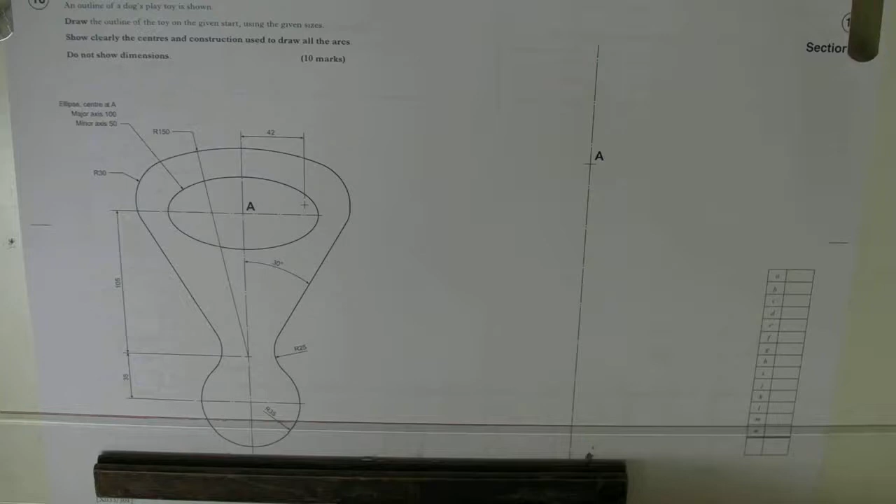Okay, I might not do a lot of talk on this one, but just try and show you.

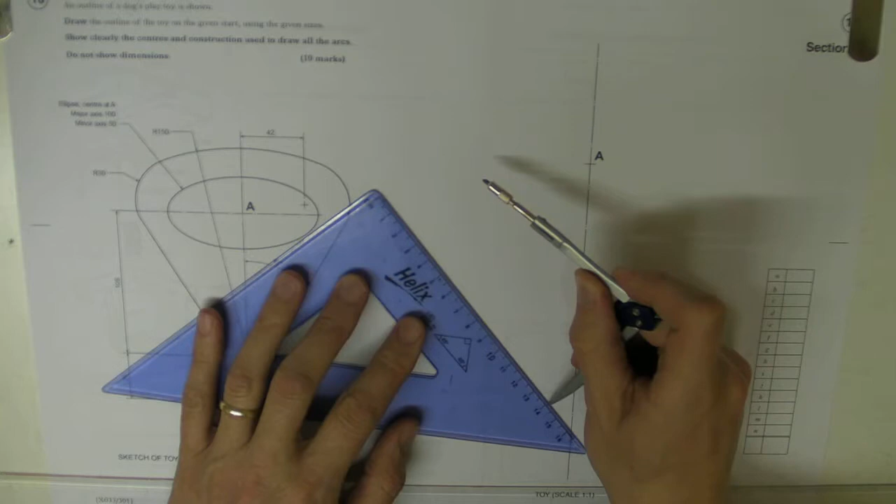Firstly, I'm going to start with this circular part down here. It's 140 down from A, so you just set the compass and measure down. That's the point there. Set up a centre point.

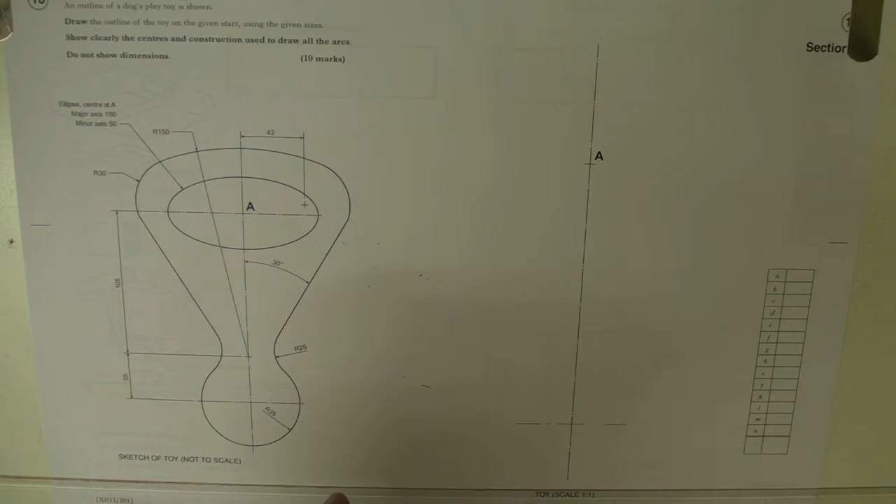Okay, this wee circular bit down here is radius 35. Compass to 35 and then draw it. Obviously it doesn't go all the way around, so I'm just going to take it round like that.

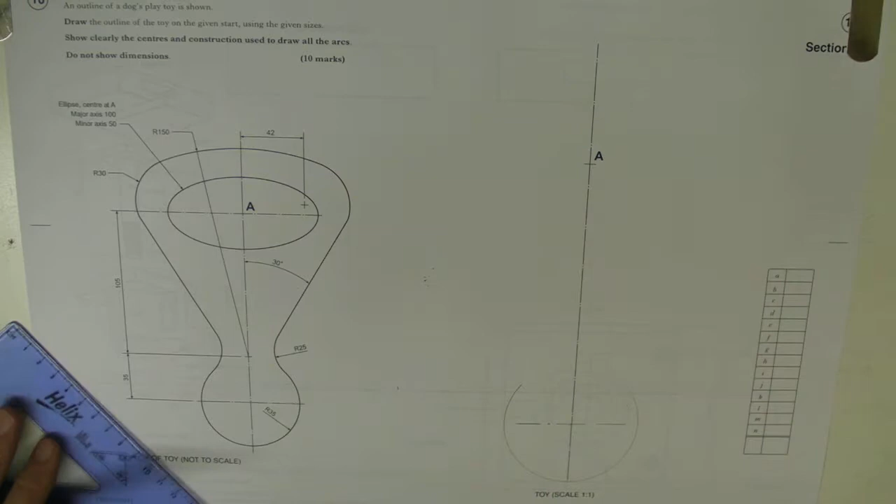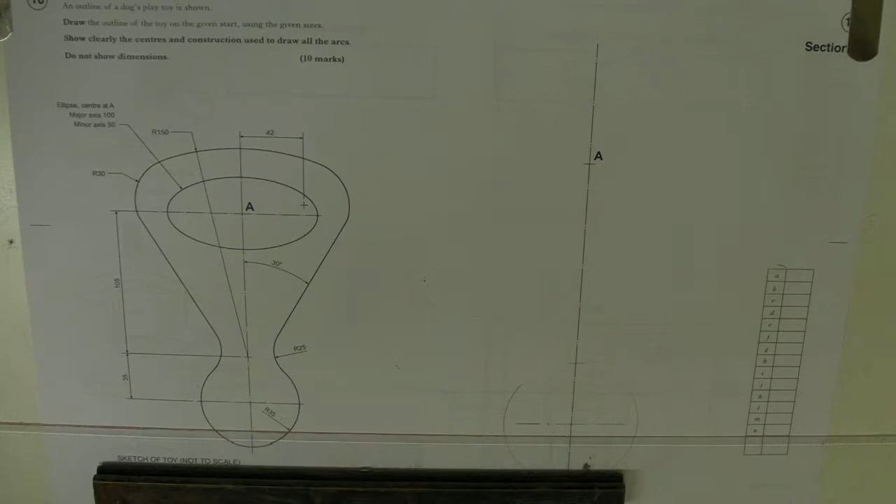This big curve here, centre is there. It's 35 up from that centre, sorry. So it's there. That's the centre point there, and it's 150, so set the compass to 150. It's a bit of a stretch, but just the way to do it. It's 150.

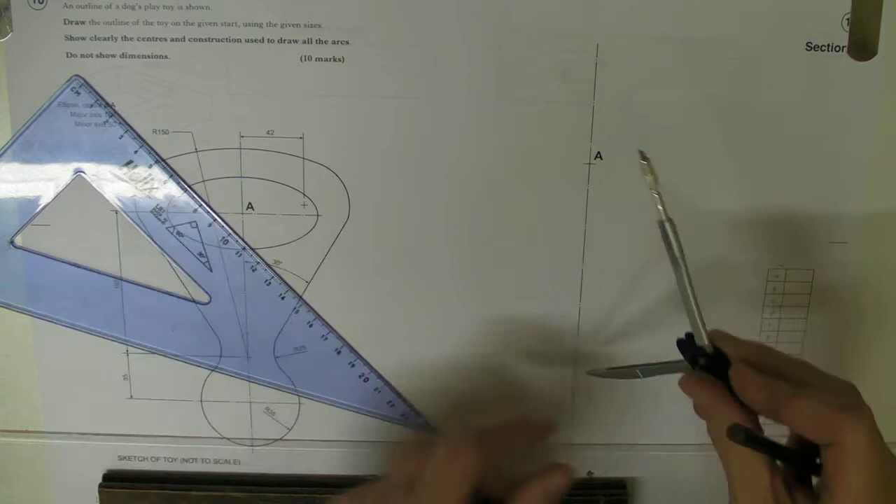Okay, so that's probably the easiest bits to do.

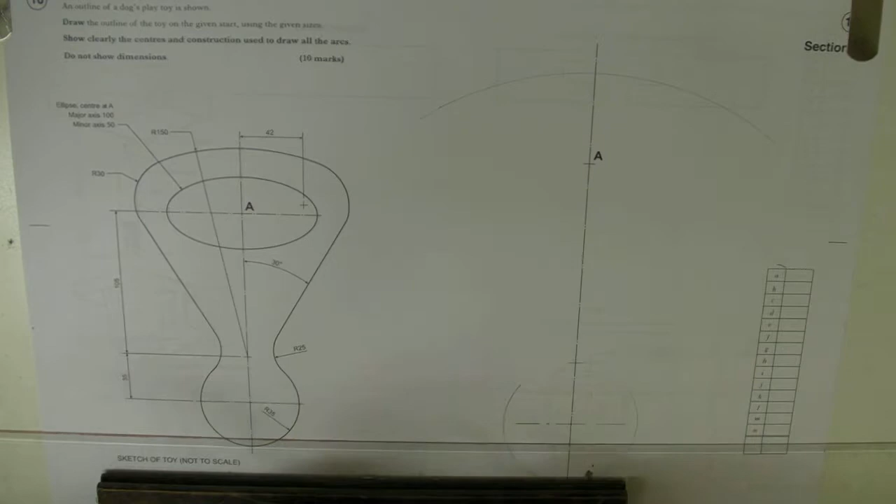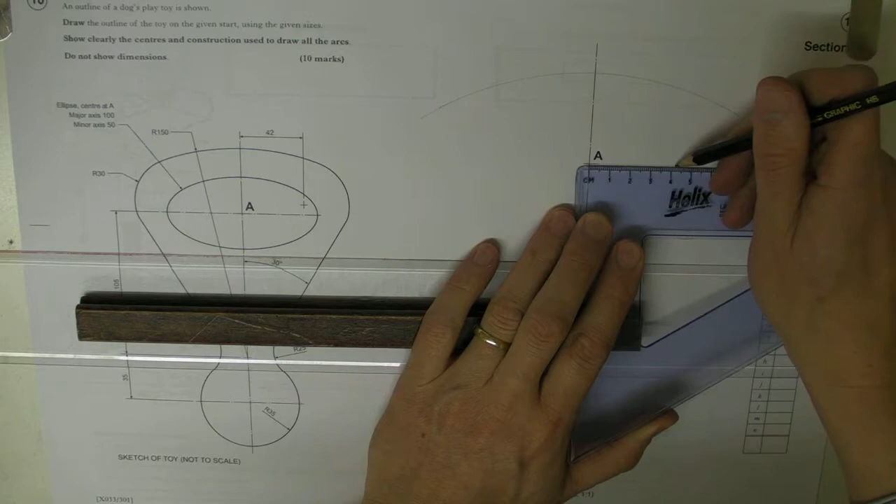The centre here, which is the centre of the arc here, is 42 from A. We don't know how high up it is, but we just know it's on that point. So I'm going to draw a wee line out, measure out 42 and mark it. That's 42 there. Then just going to mark a line.

I know it lies on that line somewhere. I'm going to check something a minute. Actually, I'm going to stick my compass in there, put that so that it's on that line, and just make sure that it would actually trace it out. Yeah, you see there, it does.

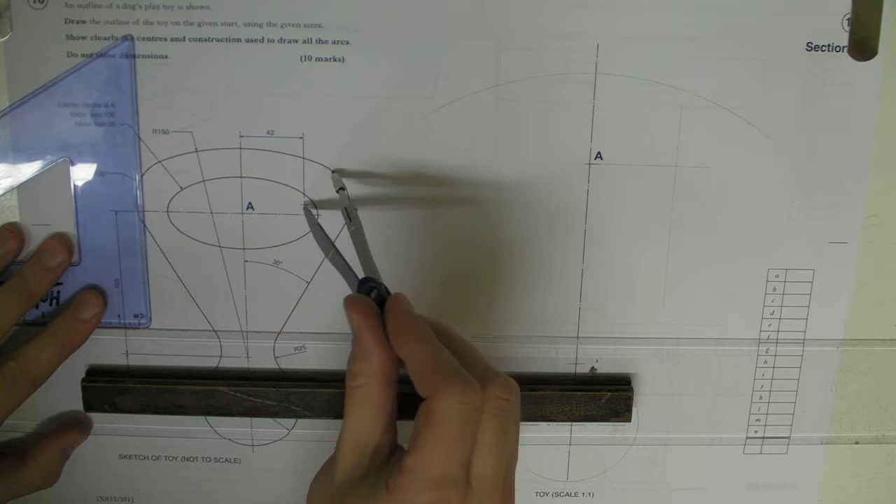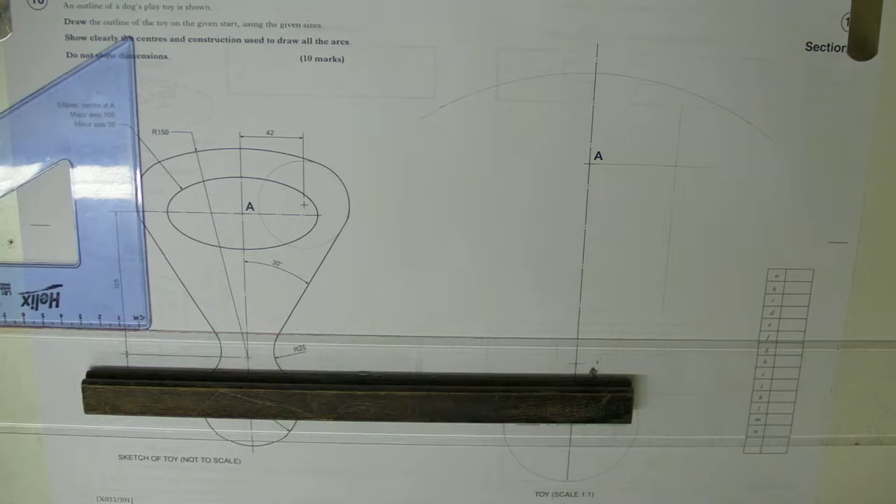Okay, so we know that's like the kind of right point for it. So that's clearly a tangent to - if you draw it in actually, I'll show you - it's a tangent to that curve there. So it goes inside that one, right? And it's also a tangent to that line at 30 degrees.

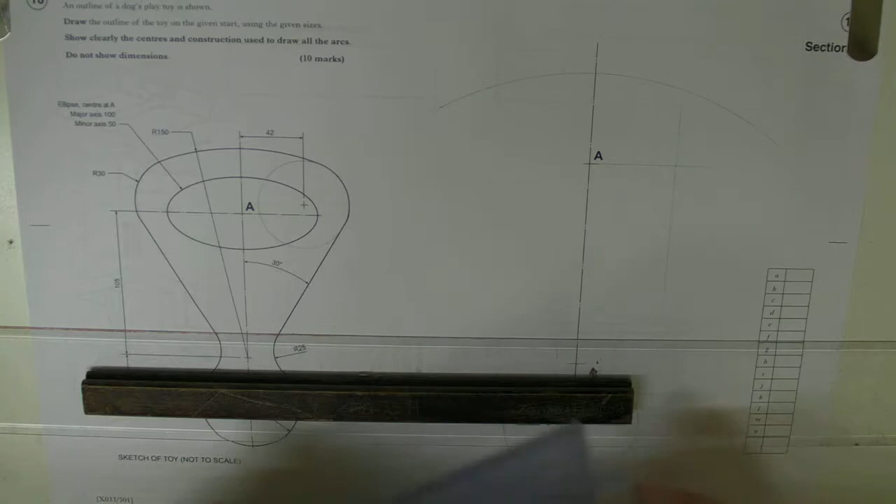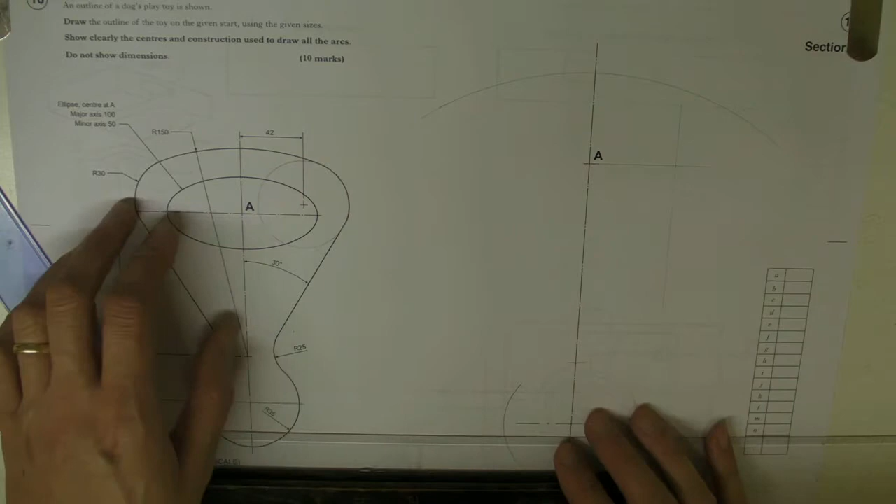Okay, which we'll work out later as well. So I'm going to have to find out the height of that. Now the usual way to do that would be to use the radius of this, which is 150, the big curve, right? So the distance from that curve to that point is 30, right? So if I take 30 away from 150, I get 120.

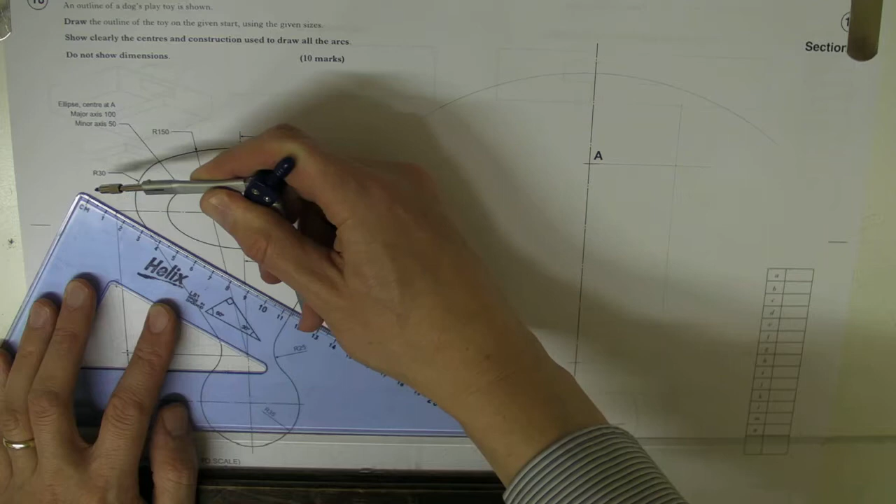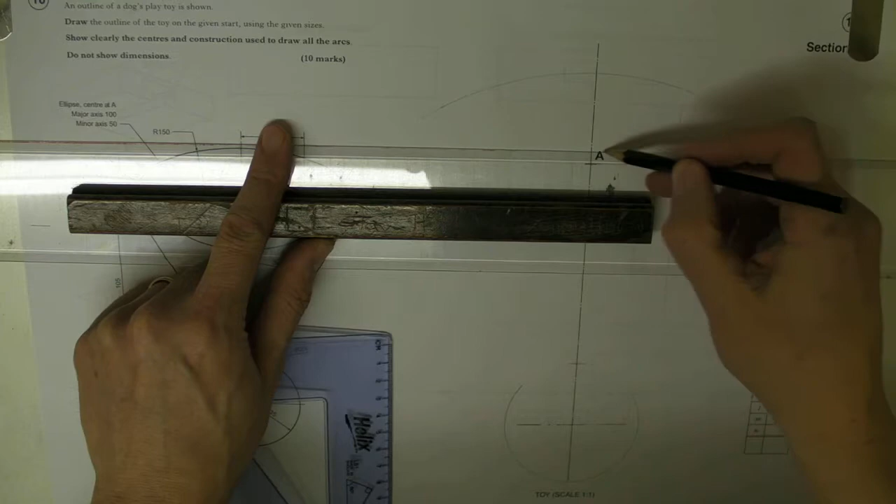So I know it's going to lie on a line 120 from this centre. So measure and mark 120, and do it as precisely as you can. So I'll go to the centre of the big circle and do a wee mark. Now where that's meeting up with the line at 42, I'll just project this across as well because it's going to be the same on the other side. That's the centre point.

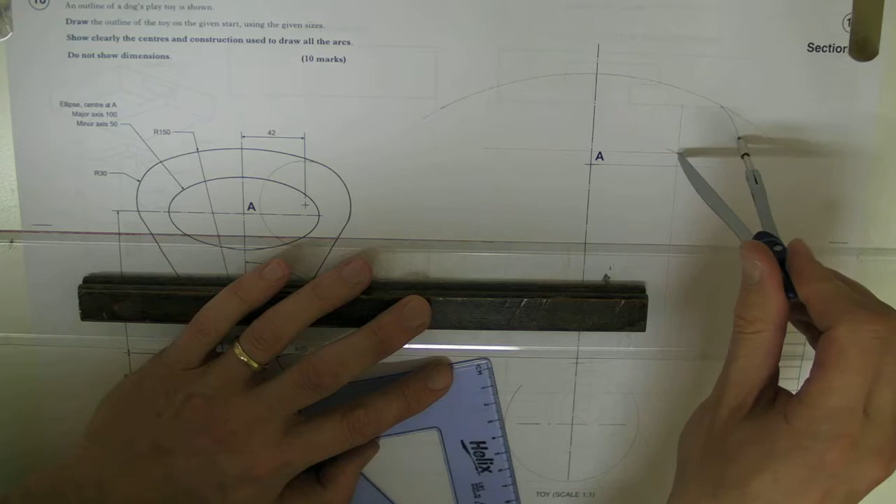So if I now set my compass to 30, then take a look, that should end up being a nice tangent to that curve there. So there it is there. It's a wee bit out, isn't it?

You've got to be really, really careful with these. You get out a slight amount and the whole thing gets thrown off. Yeah, it's a wee bit big. So yeah, there we go. That's that fitting in there.

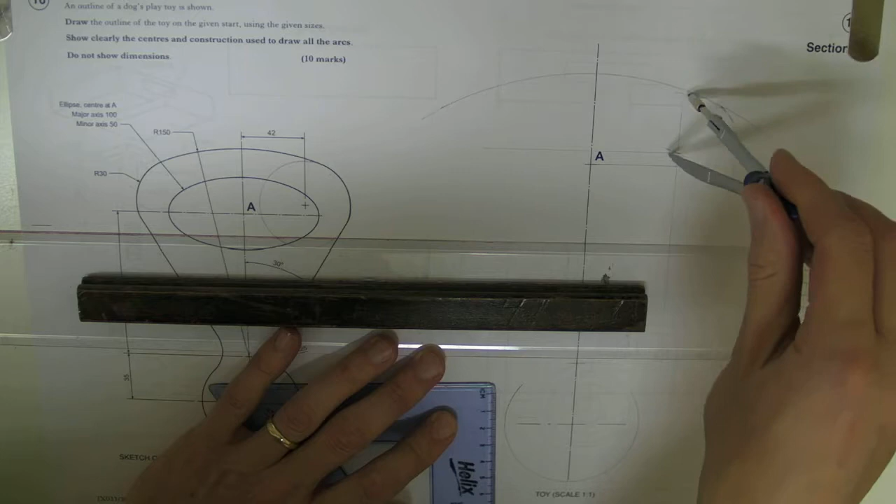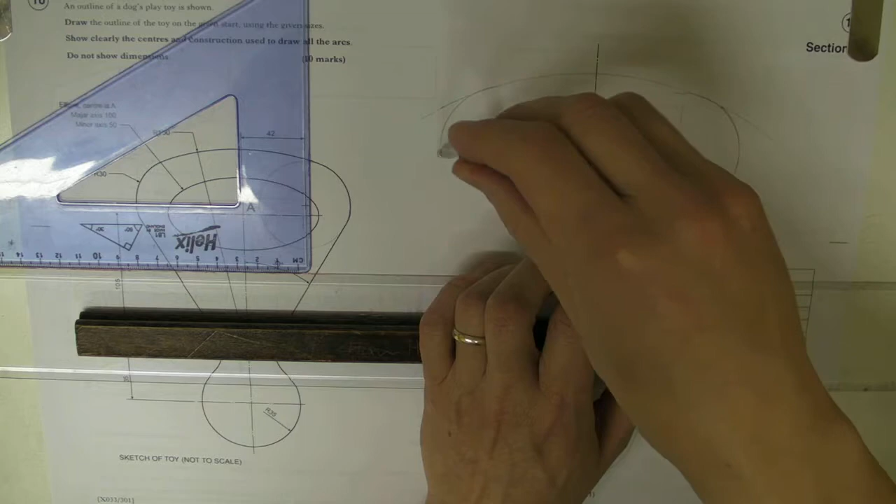Okay, so there, and it's the same on the other side. So just measure 42 along from here. Precision is really important when you're doing these. So I'll not move the compass. There you go, so it fits in, that's much better on that side. That becomes part of that there, so maybe just extend that around a wee bit more.

Okay, right, so that's us got that bit. So what else have we got? Right, we've got

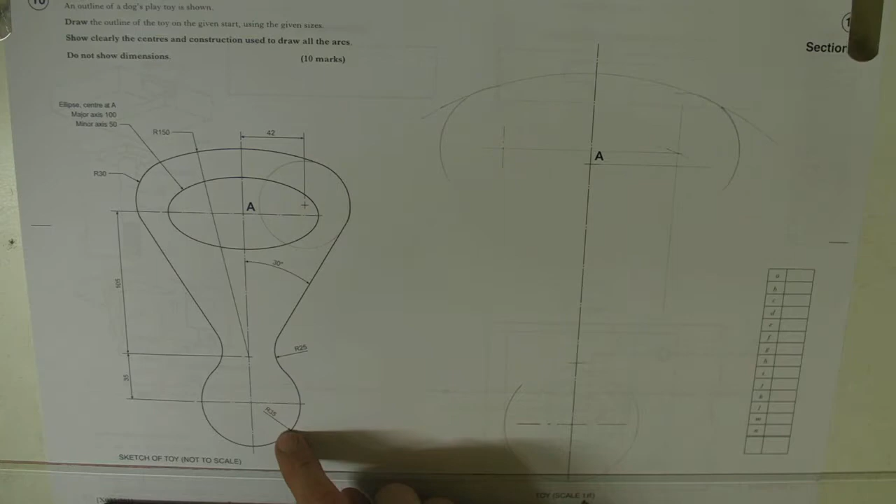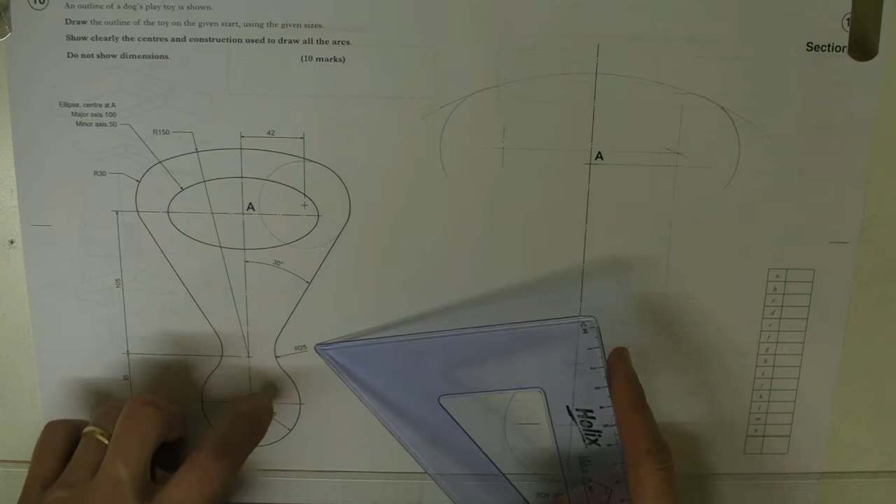a 25 being a tangent, an outside tangent to that 35. Now to find that, what you do is, if you think about it, right, the centre of that is going to be 25 away from it, so it'll be over here somewhere, and that means it's going to have to be another 35 away from the centre of this one. So that's an add, so it's 25 add 35, so that's 60.

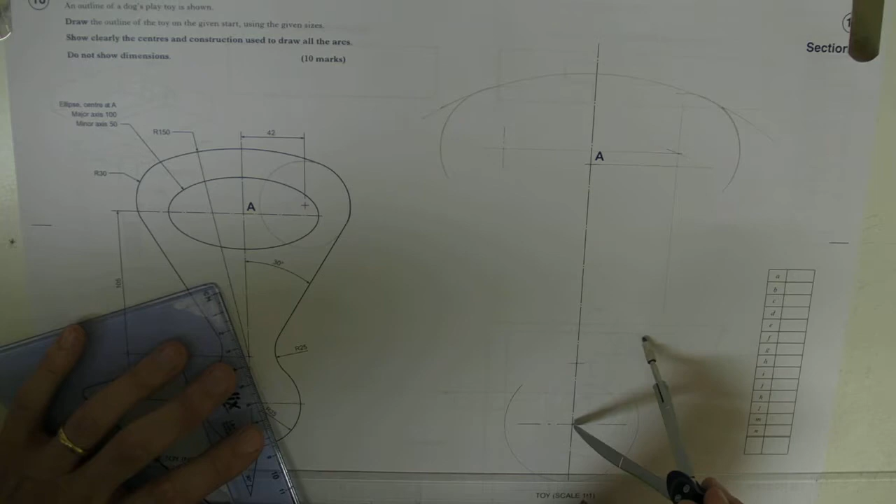So I know that the centre of that is going to lie 60 on this circle, 60 away, so it's going to be somewhere - set that to 60 - somewhere here. Okay, and it's going to be somewhere over here as well. Right.

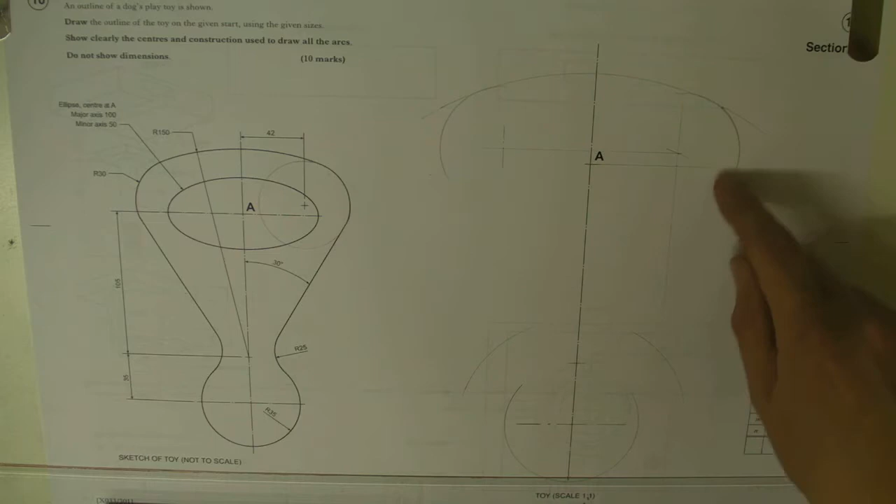So all that remains really is to draw in these lines here at 30 degrees, which are also tangents to this circle here. Okay, well, that's not all that remains, to be honest. We've got to do this ellipse in the centre, but that's really quite straightforward. So I'll show you in the next video how to do these lines and then find out how to find the centre of this.